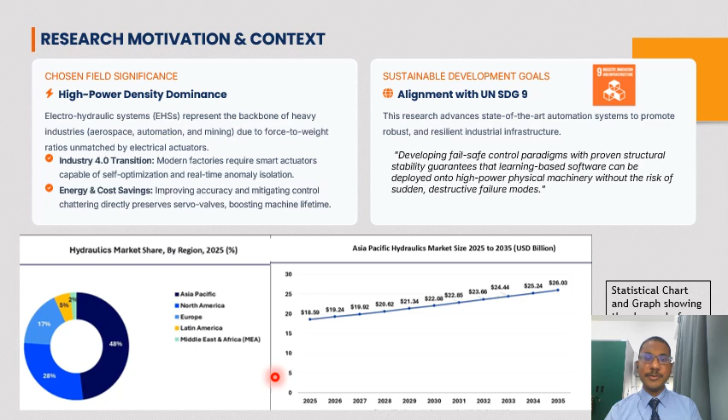And in terms of conventional controller limitations, fixed PID loops cannot adapt to parameter variations. Sliding mode controllers introduce chattering, which affects the actuator's performance, and model predictive controllers require accurate models for real-time implementation.

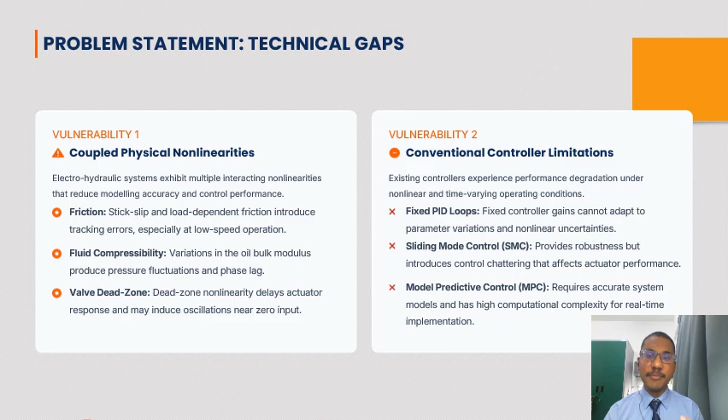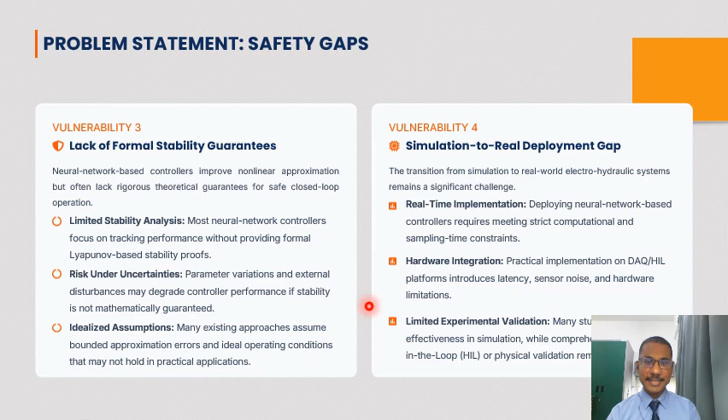The problem statements in terms of safety gaps are the lack of formal stability guarantees, which is the limited stability analysis through Lyapunov-based stability proofs, the risk under uncertainties due to parameter variations, and the idealized assumptions which may not hold in practical applications, and the simulation to real deployment gap, which is specific to real-time implementations of the controllers, the hardware integrations of the controllers, and the existing yet limited experimental validations available.

In terms of the research scope and boundaries, it is focused towards the physical test rig platform, the uncertainty parameters, which include load profiles, internal leakages, and external disturbances, the intelligent architecture of the controller, the development ecosystem, MATLAB or Simulink, and the hardware interfaces that are present during this research. And the exclusions of this research include no reinforcement learning, no multi-axis networks, and no embedded field programmable gate array, or FPGA.

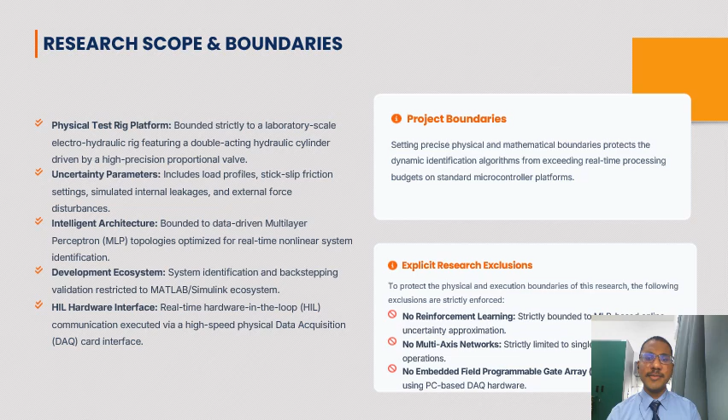Among the questions asked throughout this research is how can this controller be designed and trained to capture the nonlinearities under various load profiles? How can this architecture be integrated into the controller, and its tracking stability be mathematically proven using the stability theory? And how does this controller minimize tracking delay and suppress the chattering on the physical system itself?

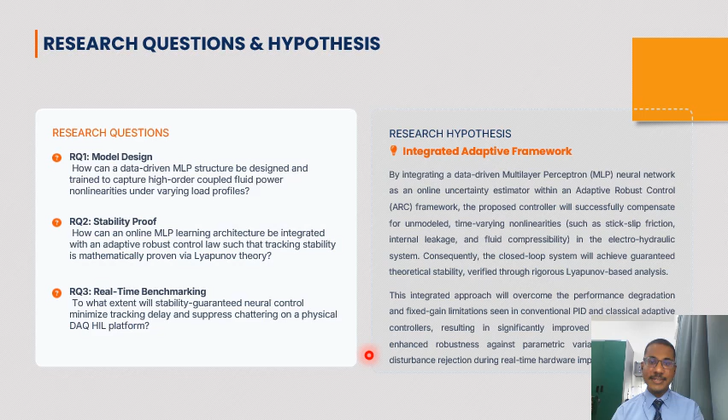The hypothesis of this research is that this controller will compensate for unmodeled time-varying nonlinearities, achieve guaranteed theoretical stability, overcome performance degradation, and with improved tracking accuracy, enhance robustness against variations and disturbance rejection during real-time implementation. Among the objectives of this research is to develop a data-driven neural network dynamic model, to design the stability guarantee control framework, and to experimentally validate and benchmark the controller against the standard PID and classical SMC.

Among the physical gaps that have been identified throughout the literature review is the stick-slip friction found by this study, the internal fluid leakage found by this study, the bulk modulus variations or shifts in oil stiffness by this study, and most importantly, the valve dead zones found by this study.

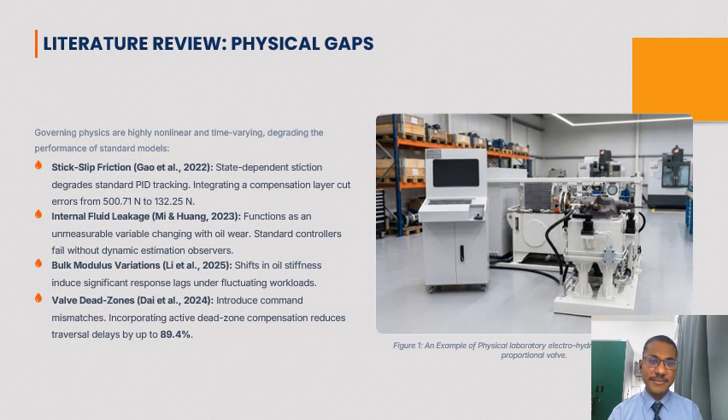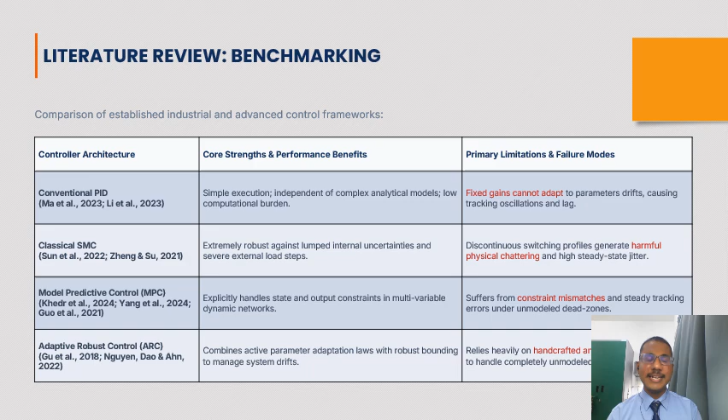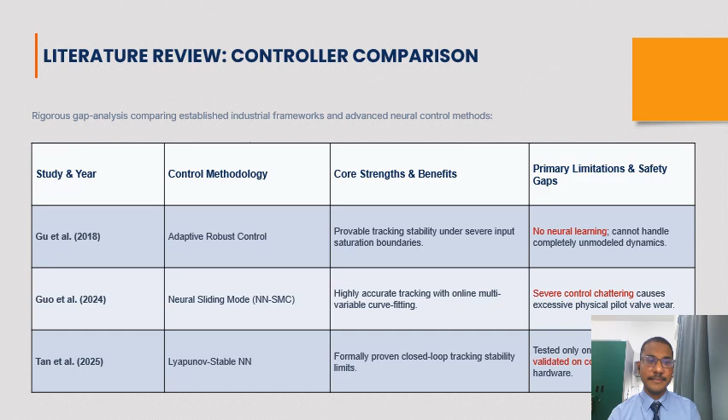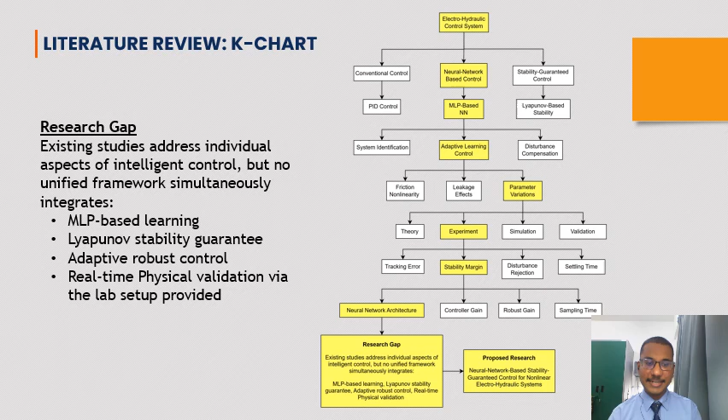To fulfill Objective 1, a comprehensive literature review on existing studies is carried out. From there, we specify the limitations of control strategies to establish constraints and research gaps. And then we develop the mathematical system modeling, which is then validated. If the validation fails, it is refined and corrected before moving to the data-driven modeling.

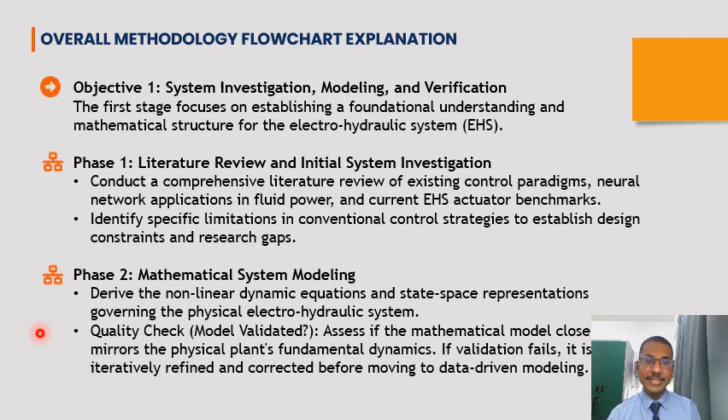To fulfill Objective 2, first we collect the data as shown here, and then from this data we develop, train, and optimize the neural network modeling for the next phase, which is designing the controller based on the neural network model, and then we carry out the stability analysis. If the stability criteria is not met, we either redesign the neural network model or redesign the controller itself before moving to the final 2 phases.

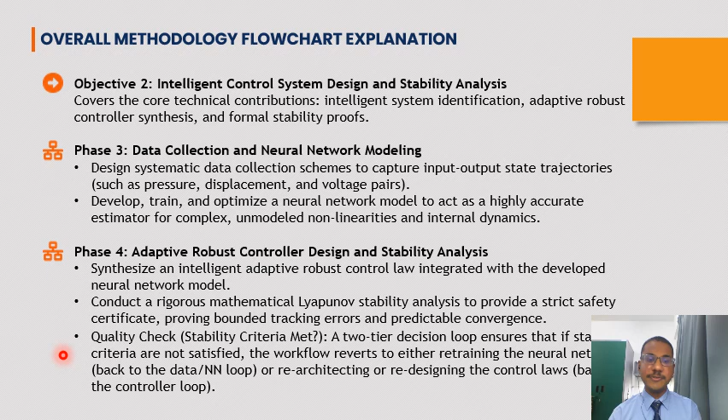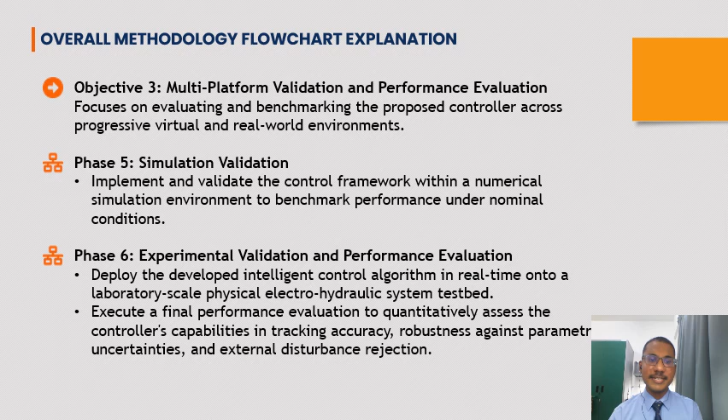Finally, to fulfill Objective 3, first we carry out the simulation validation under nominal conditions, then we carry out the experimental validation in the laboratory scale physical hydraulic system, whereby the final performance evaluation is executed to assess the tracking accuracy, robustness against parameter uncertainties, and external disturbance rejection.

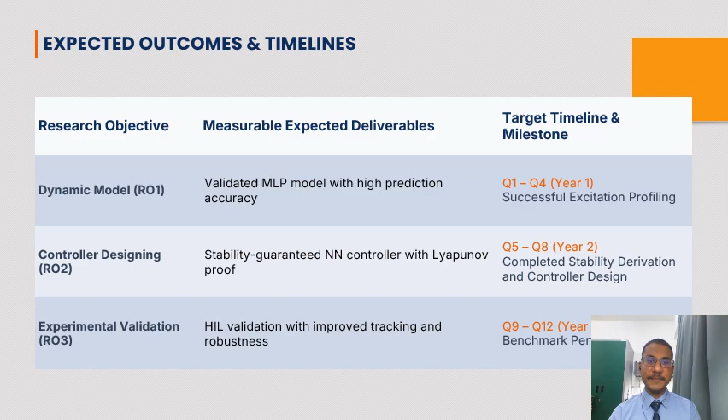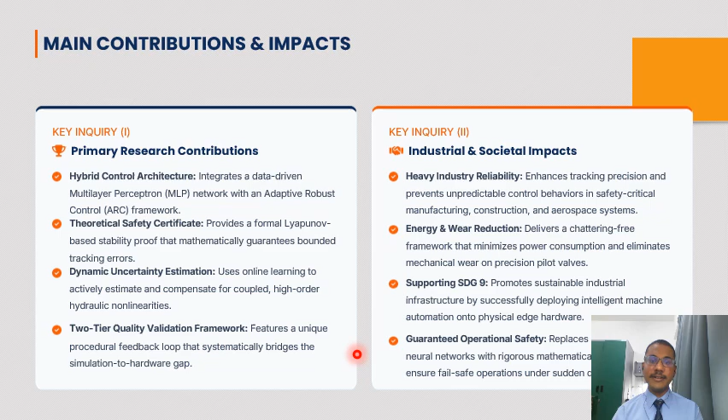Among the contributions of this research is that it aims to develop a hybrid control architecture, a theoretical safety certificate, which is mathematically proven using the stability theory, a dynamic uncertainty estimation using online learning, and a framework that bridges the simulation to hardware gap. And in terms of the industrial and societal impacts, this study brings heavy industry reliability, energy and wear reduction, supports the SDG 9 by the United Nations, and guaranteed operational safety during fail-safe operations.

In conclusion, this study aims to directly address the absence of formal stability guarantees typically found in standard intelligent control architectures and ultimately aims to deliver an efficient control strategy that enhances operational reliability and energy efficiency in industrial automation systems, which supports the United Nations SDG 9.